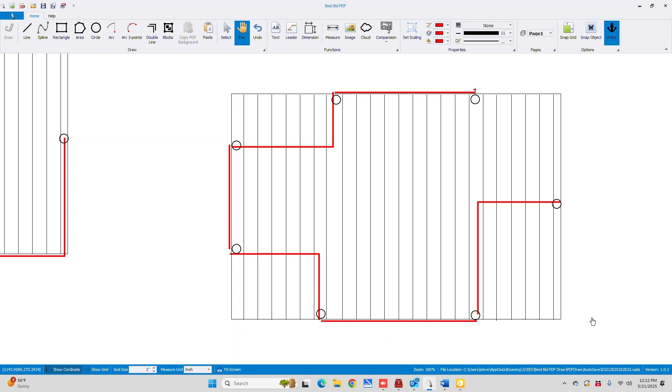Now, people argue all the time that, oh, I'm going to go through the wall to this receptacle, then I'm going to go up and have to go between this joist and go to this receptacle and then down the wall here. Then I got to drill through these again and come over and go there. And my wire's not going to be the same as if you go around the room. Well, let's just look for just a second.

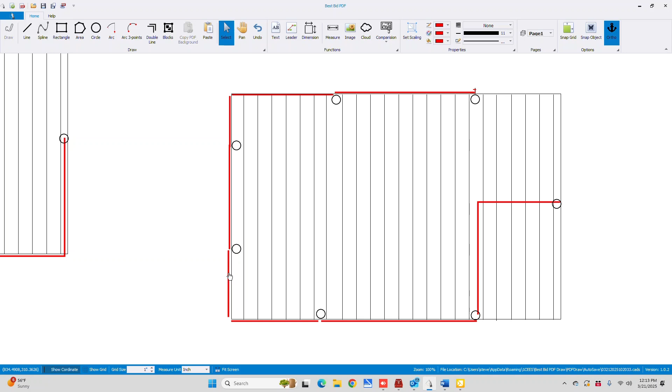If I move this here, this should have been... I'll move this here. So you see that it's virtually exactly the same with a lot less effort and a lot less thought.

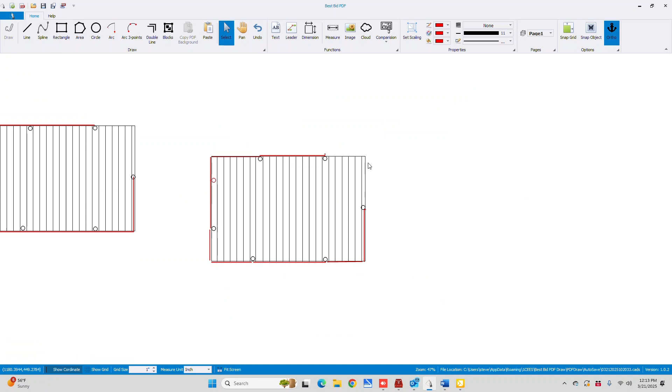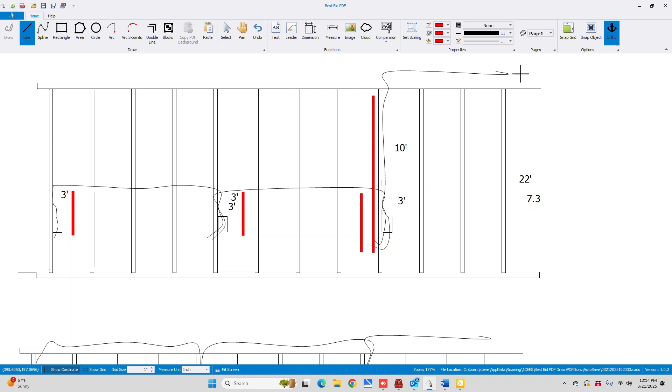Now, I also want to address that I'm only addressing the horizontal run. There's a vertical part of this as well. So the vertical part of the run is this part here, of course. So what we are addressing originally is this part of the run. So now we're going to go into a big debate of how much conductor to allow to go down to this receptacle.

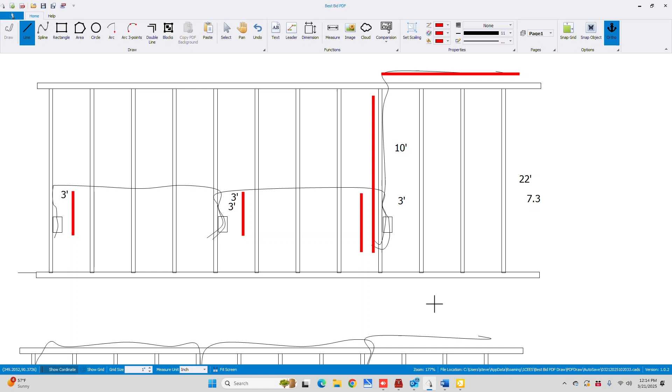This is, you can debate this all day, every day, and I'm going to try to make it simple for you. But in reality, if you came 16 inches off the floor, hammer high, that's what we used to do in the old days, and then the box is 4 inches, then you've literally got about 76 inches from the top of the box up. And then you'll have a foot out, so 7 foot 3 inches.

Now that's putting it tight. It's not going to be less than that. And if you leave more than that, you're not going to have enough conductor in your estimate. So I personally count from here to here 10 foot. Now you can argue that it's a different length, and I cannot disagree, but I'm going to kind of show you why I use 10 foot.

So let's just say this is a typical installation, and we already have this accounted for. So we're going to come down 10 foot and go up 10 foot. We already have this accounted for. We're going to come down 10 foot, go up 10 foot, go over. We have this accounted for. We're going to go down to here 10 foot.

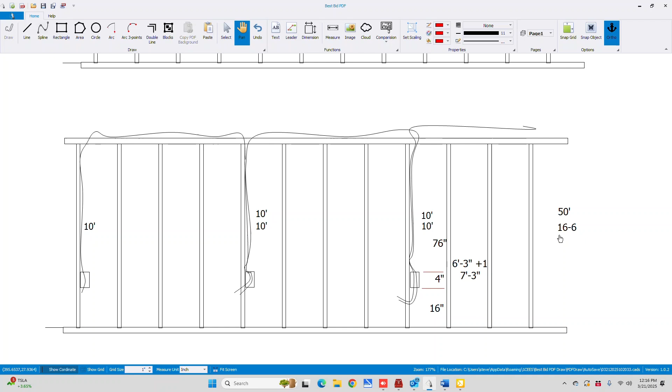So that's 50 foot of conductor that I've added in a different way for 3 receptacles. So that's 16 foot 6 inches per receptacle. So the average of these combined would be 16 foot 6. Now let's look at a more realistic installation.

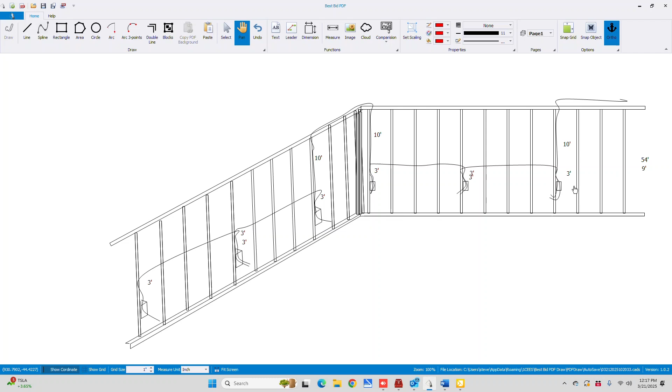So if we came down 10 foot, up 3, down 3, up 3, down 3, up 10, down 10, up 3, down 3, up 3, 3, that's 54 foot. So if you divide 54 into the 6 receptacles, now you're 9 foot apiece.

So this is where the controversy can be. Me personally, I'm going with this method right here. This is worst case. It's never going to be worse than having to come all the way down and go all the way back up, not drilling through anywhere. So that equals 16.6.

Now you can call it 20, or you can call it any number you want to, but you have to come up within your mind with what you're going to allow for the vertical runs from a receptacle and a switch. My point is, if you use 20 foot, it's going to way more than cover it, but it's not going to be enough to cost you the job. You can go down as low as 15. So I would choose a number between 15 and 20 to take care of this vertical drop.

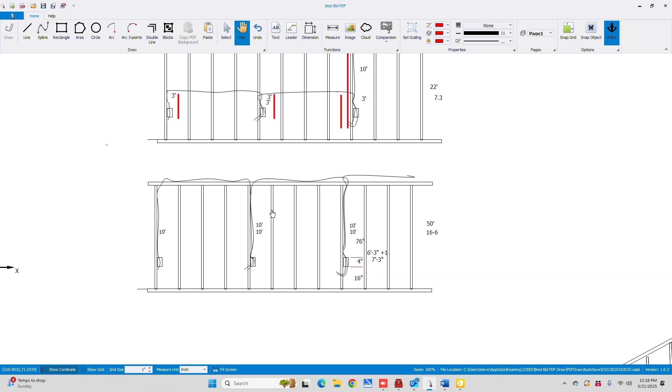When you go over to this particular drawing, you can see that you're going to drop down 10, go through the wall some, you're going to have to go back up again, come back down. So you can get it as low as 9. So honestly, if you go as low as 9 and someone drills a hole a little too high, then you're in the hole. So my recommendation, I know I'm going around the world talking about this, but it's very important. It's the most misunderstood part of it.

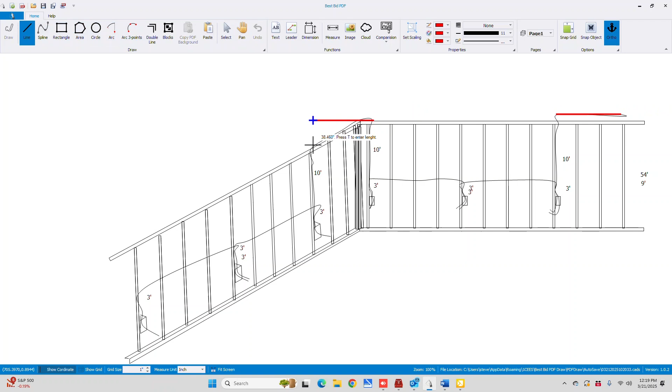So we're going to scale all these runs that go across the top of the wall. We're going to know what this portion of the wire is going to be. On the software takeoff, you can allow and figure out these drops each time. But it's much easier just to measure this and use an average for the vertical part of it, which again is this part. I'm going to go over and over because I know that this can be confusing and this gives people the most trouble.

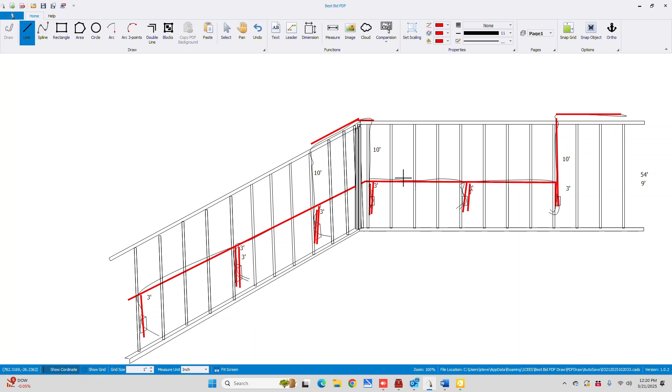So my suggestion is pick a number between 15 and 20 foot to take care of your vertical drops. Horizontal, we're going to know. Vertical, we're not. Now, when you get to the software and you have your receptacles, this distance apart is where I'm talking about adding for the vertical run of this circuit. So 20 foot covers it, all the way down to 10 foot is tight. So from 15 to 20 foot is probably the best choice. So you can add your 15 to 20 foot here in the distance apart.

Now we're going to get into detail about this later, but let's open a house on the template side. Residential panel, going to go to receptacles. We already have these created for you. So these are your receptacles. So let's say there was 100 receptacles. And let's say you put your distance apart at 20. I know you're going to be covered at 20.

Now, you would go to custom items. You would open up your measure. There's nothing in here yet because we haven't measured anything, but your horizontal measurements would be right here. So if that was 1,500 foot, you just would add 1,500 foot for your horizontal. So this is taking care of your horizontal portion for receptacles. And this is taking care of your vertical. Now, I don't care what part you use there, but this is the easiest way to cover it and have it done. Now, you can cover it all here, but it's way too time consuming and too much thought process. You want to get through the estimate as soon as possible.

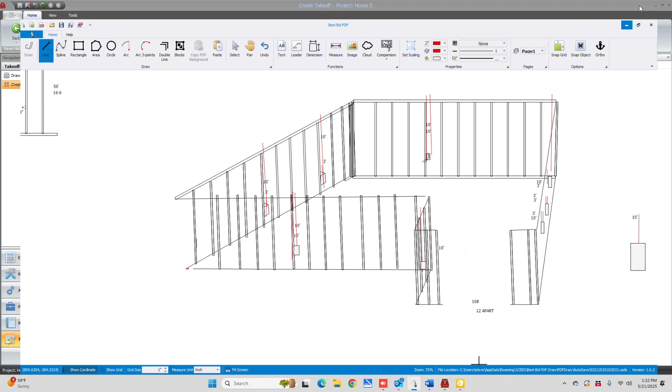So when we go to the estimating side, this is the way you enter it. I'm going to go to the residential control panel, select receptacles, open up the pre-created residential assembly. So now we want to open up our count and view. Our counts are 7 receptacles, so we just would enter 7 here.

And then our measurements, well, let's stop. Our measurement is going to be 80 foot. So we would enter that 80 foot under custom items. So we'll say 80 foot of 12-2. That's going to cover our horizontal lengths. Now we need to set this distance apart to catch the vertical lengths. So 15 foot will amply cover it. It was 12 foot something, but let's just say 15.

That completes the whole circuit. Now we can just amplify that by the rest of the devices in the room. So you just have to choose the distance apart to carry your vertical, and we're going to put the horizontal length here. So that's all there is to it. That's going to take care of it. Hit save, assembly details, and that's going to be our products that we need. So that's going to take care of entering the branch power for the receptacles.

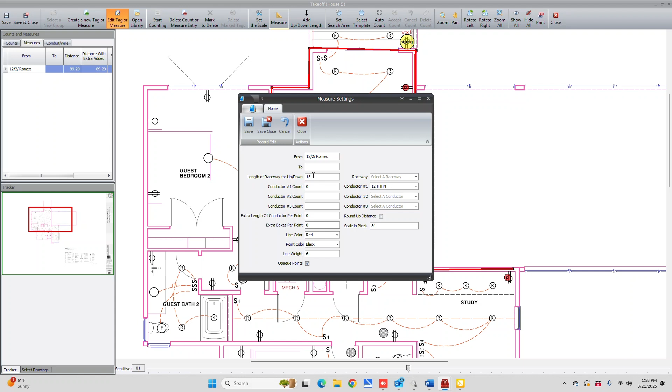And then you can open the up and down and click. And you can see it's adding 10 foot right here each time I click. So I'm going to click 10 times. 2, 3, 4, 5, 6, 7, 8, 9, 10. Now turn this off, and now I'll have that complete circuit ran with the ups and downs averaged in.

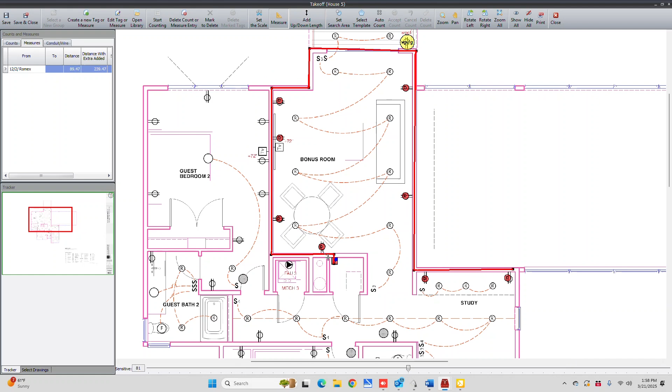Now when you save and close this, go to the residential panel. We'll get rid of our first example. We would open the viewer. It was representing the first time we counted it. So we have 8 receptacles, and we have 1 weatherproof GFI. So there's a weatherproof GFI.

Now I'm going to zero out all the lengths, because in this example we included the measurements. So now we have 240 foot of number 12. We would put that right here. So that is the second example of how you could do that, whichever way works best in your mind.